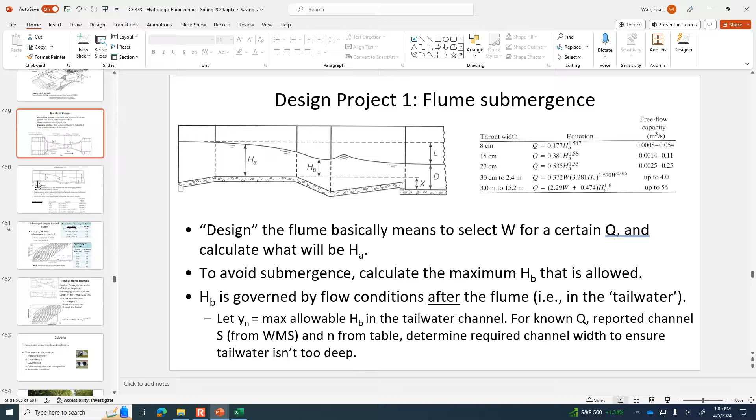Now, submergence is measured by H sub B, and that's not one of the parameters that goes into your equation. So the way that you know how deep H sub B is allowed to get is you calculate H sub A from the formula, and then you'll remember that there are these submergence criteria tables. Let me go back to where we were talking about flumes before. So here's the table of submergence criteria. So if you're using a 30 centimeter to 2.4 meter flume, then the ratio, the maximum allowed H sub B is 70% of H sub A.

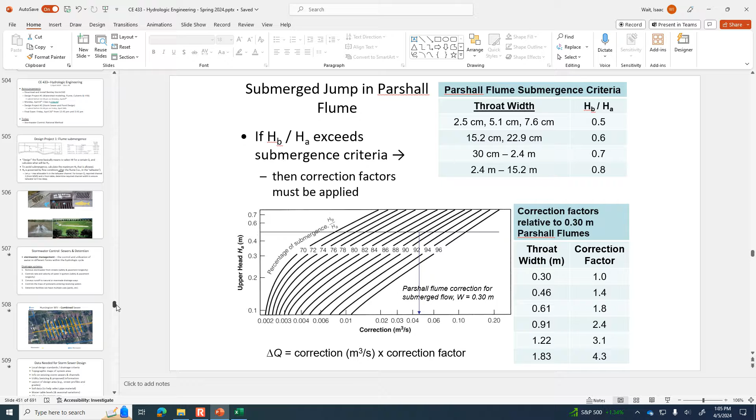Okay, so you just say, all right, so that's the deepest H sub B is allowed for the flume that you've just designed. By design, I mean you've selected the width and calculated the H sub A. So calculate H sub A, find out what's the maximum H sub B. Now what determines the H sub B depth is the tailwater.

And if the channel downstream is not able to convey much flow, like if it's relatively flat, or if it's very, very rough, or if the channel is narrow, then you would have a poor flow capacity downstream and a large depth. If the depth in the tailwater is too high, that will drown your hydraulic jump in the flume and exceed the allowable submergence. So what I'd like you to do is just analyze the tailwater.

And this is something that you've also done recently with the culverts. You know, there's that tailwater calculator within HY8. And so you don't need to use HY8. You can just use Manning's equation. Use Manning's equation and let the normal depth be equal to that maximum allowable H sub B, which you determined from the submergence table. So 70% of H sub A, for example.

And then find out how wide would the channel need to be for a typical n value from the table that's on the handout. So the table I gave you said, for example, earth-lined channel would have an n value of 0.02. So if you use that earth-lined channel 0.02 and the slope of the channel, you can actually get from WMS. One of the parameters that it estimates is the slope, not of the basin, not of the ground slope, but the slope of the channel, the main stream that's carrying flow.

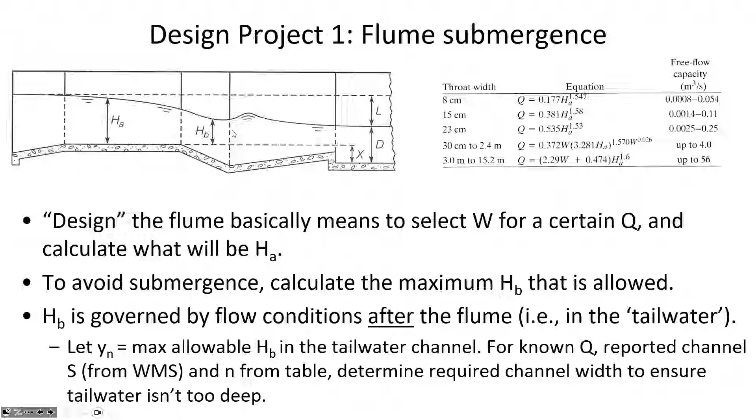Okay, well, let's talk about the rational method. We briefly dipped our toe into the rational method a few weeks ago because some people needed to hear about it for the senior projects. But let's revisit that.

You may have noticed in a lot of towns, including Huntington, some of the inlets have painted symbols in front of them, just to remind you that when you put something into a storm drain, it's eventually going to get out to a creek where there's fish. And so they're warning you, for example, don't dump used oil into a storm drain, or antifreeze; they sometimes get problems with people dumping used auto chemicals into these drains. And you shouldn't do it because storm drains will get back into the natural environment.

And sometimes water from storm sewers goes to ponds. Some ponds can just be an earth-lined area that doesn't have any development on it, a low point in a park, for example, or off to the side of a commercial development. Sometimes they can be really nicely landscaped, and it can be kind of a design feature. We're going to look at the sizing of ponds next week. But today we're going to look at what flow rate would be coming into a pond given a certain storm size. So we're moving on to the idea of stormwater management.

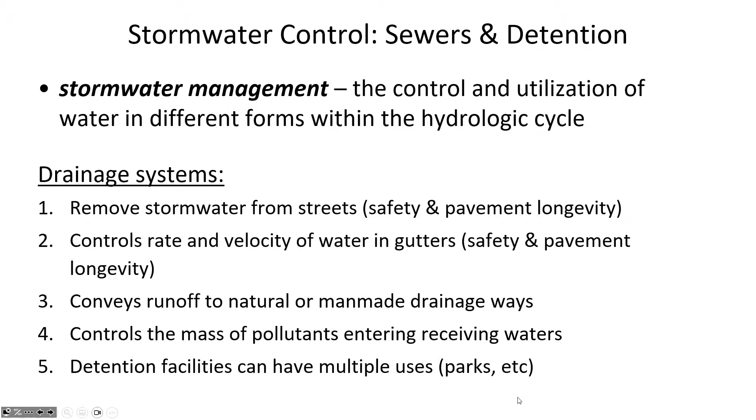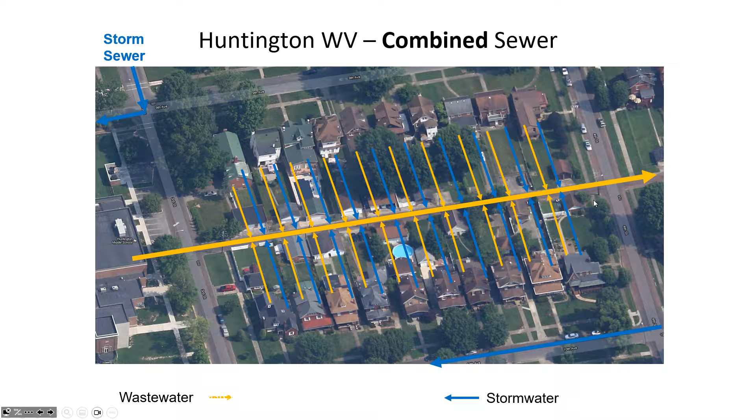And so a combined sewer would have both a base flow that's wastewater, but then also flows which vary quite a lot during storm events. So some of the things that we look for when we do a design and we're trying to manage stormwater is understanding local design standards, and if a city has regulations related to the allowable flow velocities or how much capacity you have to put into a sewer.

There are a lot of only locally applicable regulations that say how much flow capacity you have to have per square acre of land that's being developed, or how much flow capacity per 100 residents. And so you have to know those local design standards, and also having topographic data will allow you to know the slope of the land and how water's going to move around over the surface when it rains.

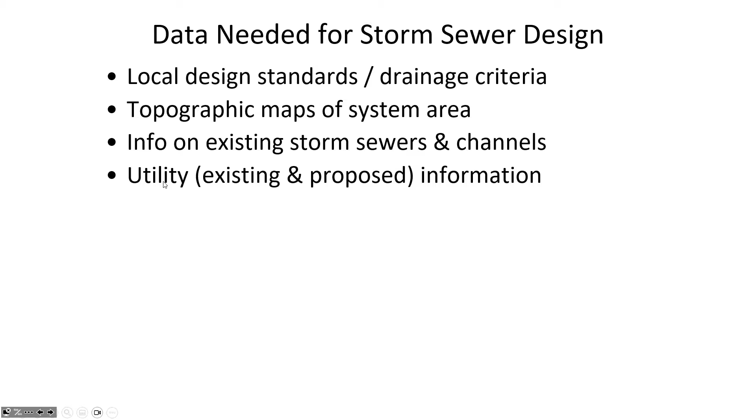Obviously, you'd want to have data related to where the existing pipes in the network are. If you're going to be putting new pipes in or trying to tie in to the existing pipes, then you don't want to overload the existing infrastructure. And so having all that existing data is really critical. There can be power lines that are also buried underground, internet, gas, and so all of the utilities you'd need to know about to try and avoid them when you lay out a new sewer line that's going in.

You'd want to have the information related to the street profiles and grades if you're expected to put in curb and gutter and inlets and manholes, then knowing where the new area development roadway network is. And then there are some soils which can be corrosive to certain types of pipe. And so whether you use concrete pipe or plastic pipe, or in some rare cases they'd use metal pipe for a stormwater drain, you need to have soil data in case there are any kind of corrosion concerns having to do with the materials that you're using with your network.

Knowing the water table helps you to know whether the risk of buoyancy of the pipe is a problem, because some pipes which are relatively light, like a plastic pipe, if the water table is above the pipe, then there can be a buoyant force that pushes the pipe up, and in some rare cases the pipe can actually break through the pavement that's over the top of it,

if the water table is high enough and the diameter of the pipe is high enough, the buoyant force may exceed the weight of the soil on top of the pipe. So knowing the water table can be another factor that you use in determining whether you're going for a heavy pipe material where buoyancy would be less of a concern, like a concrete pipe. Rainfall data for the project area, pipe property.

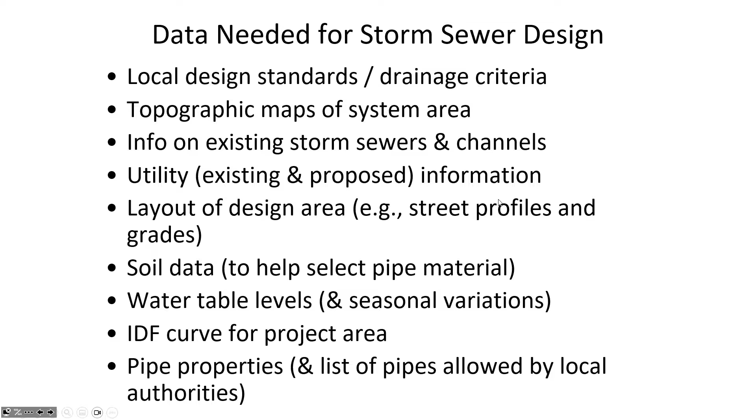So all of this would be kind of the baseline of information that we'd want to collect before we do a design and figure out what type of pipe we're going to have for conveying stormwater, where it should be located, the required diameter, how frequently spaced inlets are.

So some of the things that we'll assume for stormwater collection networks is just that water is flowing by gravity. Hopefully we can achieve that, because when you put in a pump station for stormwater or for sewage, it's really expensive to lift water and to pump it from one place to another.

Electricity costs already account for a huge percentage of the cost of treating wastewater, and that's even before you take into account the electricity that could be consumed when you're pumping water from place to place. So ideally what you want to do is design your flow so that it's going towards the lowest part in the network, and you don't have to put in pumps to move the water around.

Typically, stormwater is moved through circular pipes, which are commercially available, and so that may limit the variety of sizes that you have. So there could be a 15-inch pipe, a 12-inch pipe, an 18-inch pipe, but maybe there wouldn't be a 14-inch pipe or a 13-inch pipe. So you just have to be familiar with what you can get your hands on in the area where a project will be done.

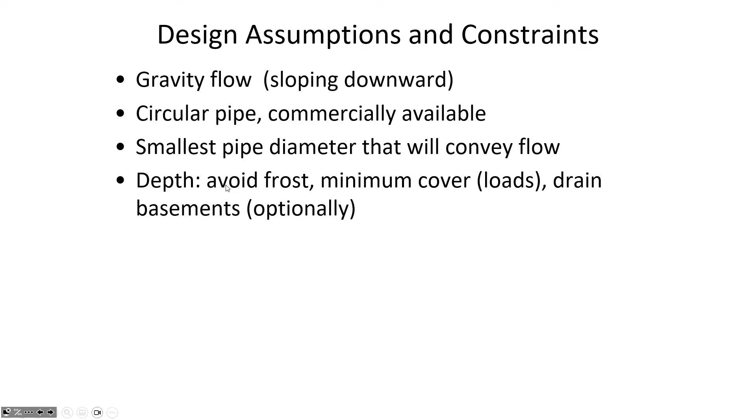We have to have some minimum cover over the top of the pipe to help distribute loads and also, depending on the climate of the area that you're in, if you bury the pipe deep enough, then the water will stay liquid even during the winter time, when otherwise it might freeze if it was buried too shallow.

So minimum velocity and sediment deposition is an issue that we're going to want to keep an eye on, the flow being too low, but also if the flow velocity in the pipe is too high, that causes erosion of the pipe and scour.

One of the principles that we employ in design is that in a dendritic pipe network, which is all funneling down to one central location where the flow is collected and discharged to a stream, or if it's being collected and treated at a treatment plant, the pipes only get progressively larger to prevent clogging. So you wouldn't have a big pipe connected to a smaller pipe and flow going from the large pipe to the smaller pipe, because then that's a risk of it becoming clogged.

So just for that reason alone, even if it's not needed from the perspective of capacity, like if you had a really steep section of ground, even if you could get away with a 12-inch pipe, if there was a 15-inch pipe prior to that steep section of ground, you'd stick with the 15-inch diameter. Even though it may not be needed hydraulically, we don't have smaller sections of pipes because they can get clogged.

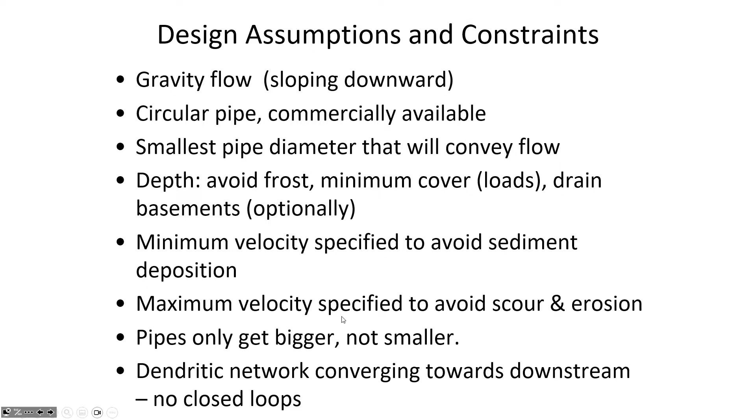And sewage treatment cost is mainly tied to the volume that's being treated, and less so related to the strength of the sewage, meaning the concentration of pollutants like BOD. And so you really want to reduce how much water is getting into the sewage treatment that doesn't need to be there. So you wouldn't want drains from the roof connected to your sewer system, because that's adding to the volume that needs to be collected and treated, and it's very costly.

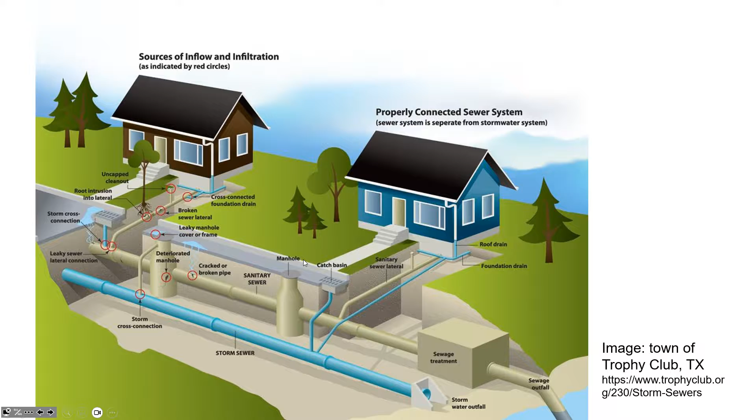An important part of managing stormwater infrastructure is doing regular inspections. And they're getting these increasingly sophisticated drivable robots that will go down in the sewer. And so far, they're always monitored by a human at the surface, who's watching a TV screen of the robot driving through the sewer.

And what they're looking for is cracks in the pipe. They're looking for illegal connections where people have put a pipe that they're not paying a sewage fee for. They're looking for what shouldn't be there, so that they can make repairs, or for violating people who are discharging to the sewer that shouldn't be.

I think in the future, most likely, they're going to have these systems become automated. And so they'd use sort of image evaluation and AI technologies to send sewer inspection robots down into the sewer, and then they wouldn't have to be monitored in real time, but maybe if the software detected an anomaly, then a technician would look at the pictures just at the problem sites rather than the whole time. The issue is that just knowing where the problem is doesn't always allow you to fix the problem.

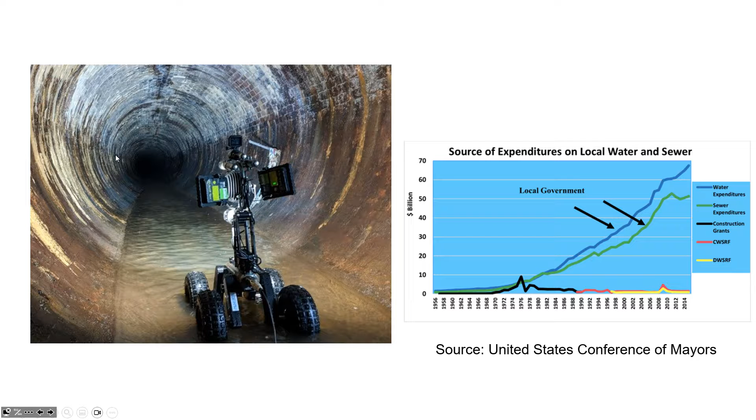But I just wanted to point out that this is more than just an engineering problem. It's also a political problem and an economic problem, maintaining this infrastructure. And so we have to think about that from an engineering perspective. Like when we are developing new land and we're putting in infrastructure, the client has to be guided in how much to set aside for the future maintenance of roads and sewer networks.

So some of the numerical limits that we're going to be applying when we do design with StormCAD is that there should be a minimum velocity associated with self-cleansing and a maximum velocity that's allowable related to scour and damage of the pipe. There's a maximum spacing of manholes that you'd want to have in place because you need access to the sewer at regular intervals for inspection and cleaning. Because not all sewers will be perfectly self-cleansing, and so they sometimes need to flush the accumulated sediment out of the bottom of the sewer. And so a spacing of 400 to 600 feet is appropriate to make sure that you can get access for cleaning and inspection.

Most sewers would have a minimum pipe size, which even if it's not needed hydraulically, a 12-inch minimum size would allow you to get camera systems down inside to inspect them. And then the other thing I wanted to point out here is that surcharge is pressurized flow in a network that is intended to flow open channel and under gravity. And so if we have a pipe that is most of the way full, so it's nearly to the top, it actually has more flow capacity when it's most of the way full than if it's all the way full.

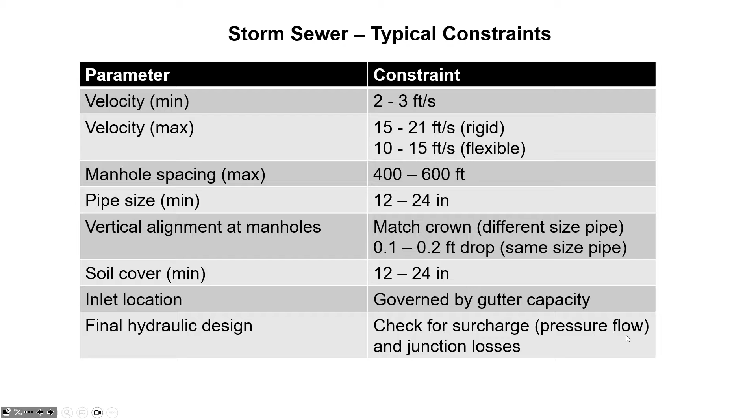the network, and so consistently in wet weather, I don't know if it's a combined sewer there or if it's just that there's a lot of infiltration and inflow into the storm sewer, but sewage is getting out there, and you can smell it because they have pressurized surcharged pipes where the amount of water in the pipe is so high and the pressure of it that it's actually coming out of the inlet covers and grates and so on.

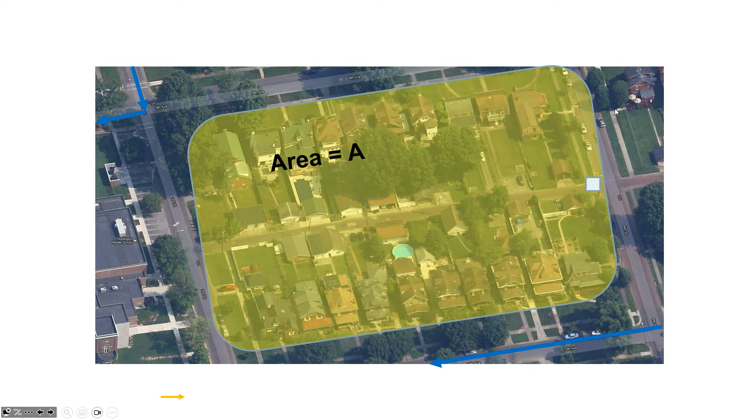So the rational method says if we know the area in question that we want to provide service to, then there's going to be a certain amount of rainfall intensity for a storm that we're interested in. So we can get that data from the precipitation frequency data server, the rainfall intensity for a return period of, say, 5 years or 2 years.

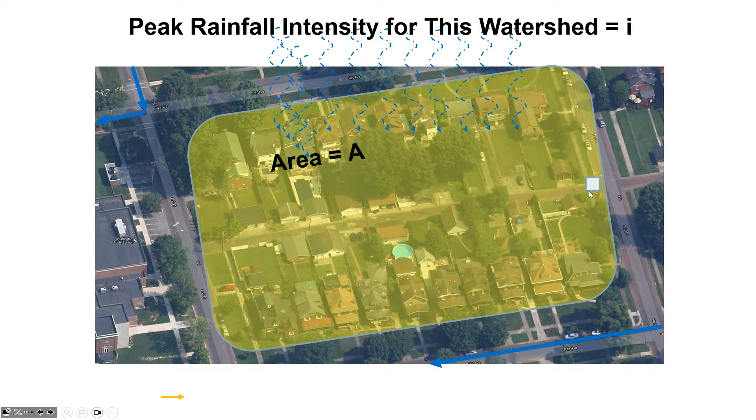Whatever we want to analyze, we can get the rainfall intensity that's associated with the return period at also the time of concentration. Remember, the time of concentration is how long it takes for the water to travel from one edge of the network to the collection point that we're interested in. So we could use the Kerby method, the Kirpich method, NRCS. There's all these different equations depending on what data we've got available and the level of precision that we require in estimating the travel time.

And so when we know the time of concentration and the intensity, then we will assess the ratio of runoff to the amount of rain that's coming and determine a C value. So we've talked about this before and how the peak runoff Q is equal to the intensity of the rainfall multiplied by the area multiplied by the C value. So Q equals CIA.

And what's the units coincidence? Do you remember the coincidence of units, like talking about the units of the left-hand side of the equation and the units of the right-hand side equation for traditional British gravitational units? With the area in acres, it'll give you a Q in cubic feet per second. And then inches per hour. Inches per hour. Good. That's right. And of course, C is unitless. So it's good you remember that.

It turns out that there's actually a units conversion factor of 1.008, if we want to make it perfectly so that it's cubic feet per second on the left-hand side, and the units that we've used on the right-hand side, inches per hour for intensity, acres for area. But 1.008, we don't usually know the C value with enough precision to even bother with that correction factor. So we'll just leave it as 1.

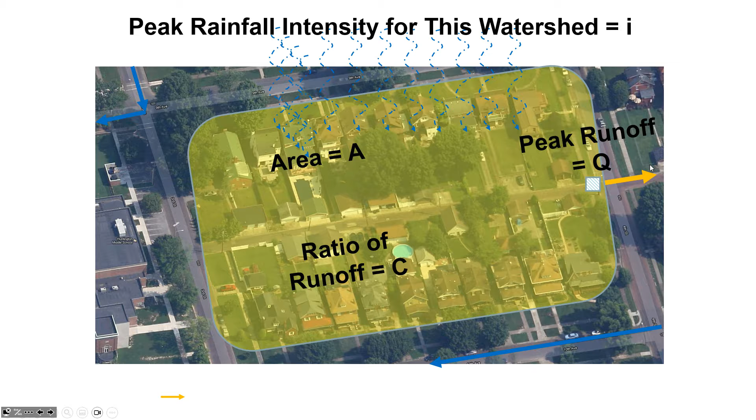So in SI units, what we'll usually do is express the area in hectares, convert it to square meters, have intensity reported to us in millimeters per hour, and we could convert that to meters per hour. And then from that we get cubic meters per hour, and we can convert it to cubic meters per second.

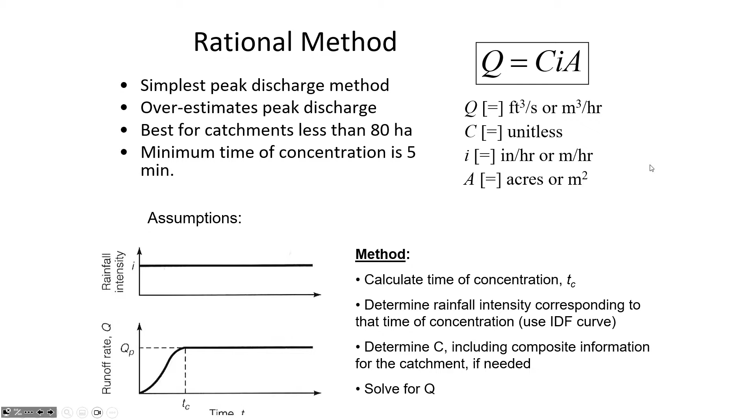So we've seen this slide before when we jumped ahead in that prior lecture. We've seen the C values for different types of materials, how, for example, if you've got a grass lawn on a flat area and you're estimating the runoff from a 2-year storm, then we'd have the C value being 0.3. No, for grass in, let's say, good condition, then it would be 0.21. So only 21% of the rain would run off, and the rest of it, 79%, would infiltrate or be retained

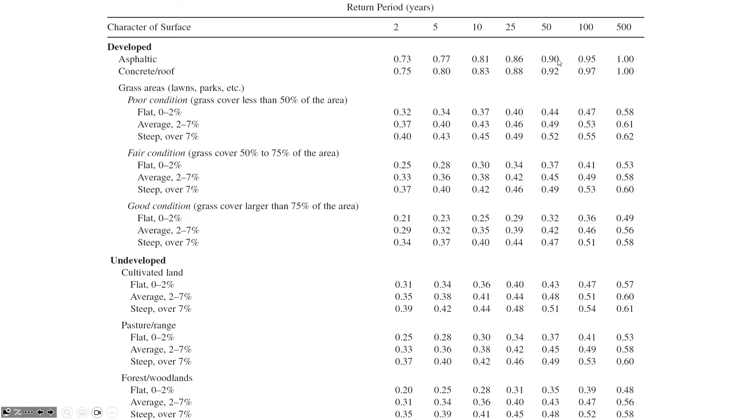on the surface. And then, of course, as the return period increases, so does the C value, meaning that more is going to run off. A greater fraction of the flow is running off for these large storms that have more volume to them. And then urban areas which are developed, like impervious surfaces like concrete or asphalt surfaces, have much higher C values, which also increase in value as the return period goes up. So we've seen these C values before, and we're going to skip over this example.

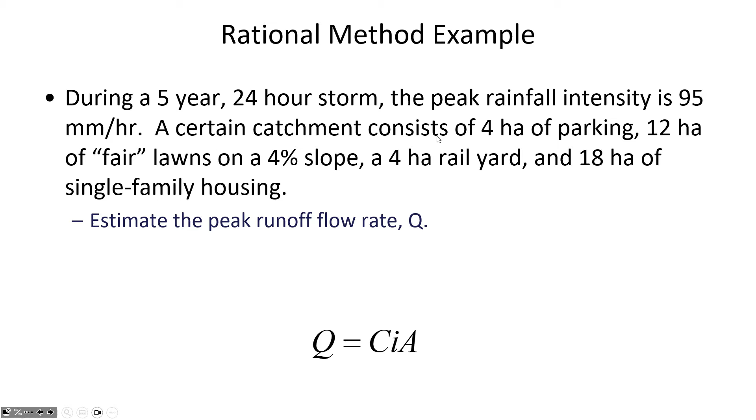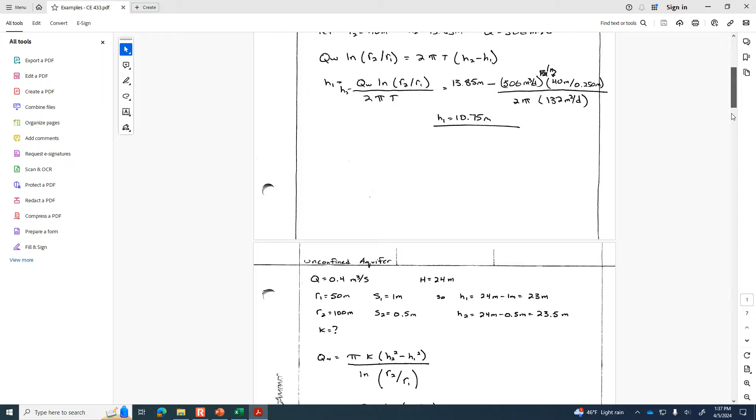This is just the same kind of thing where if you've got a certain amount of it that's parking, a certain amount of it's lawn, certain fraction is rail yard and single family housing, then what we would do is calculate a composite C value, composite runoff coefficient, like an area weighted runoff coefficient. So you can see here, if we knew a certain amount of area is each one of these, then we calculate a weighted C value based on not only the C value of the individual constituents, but their area.

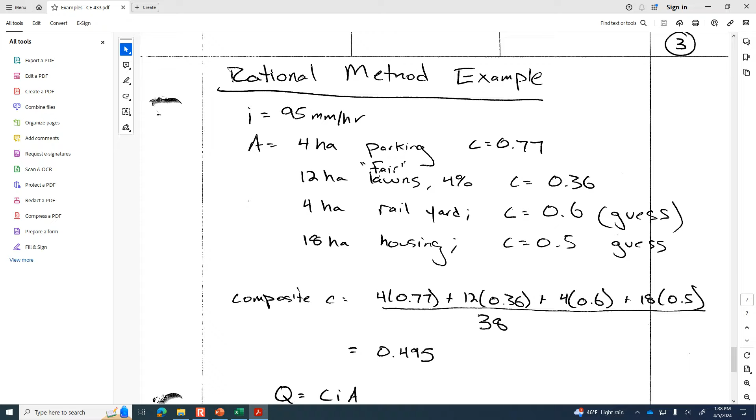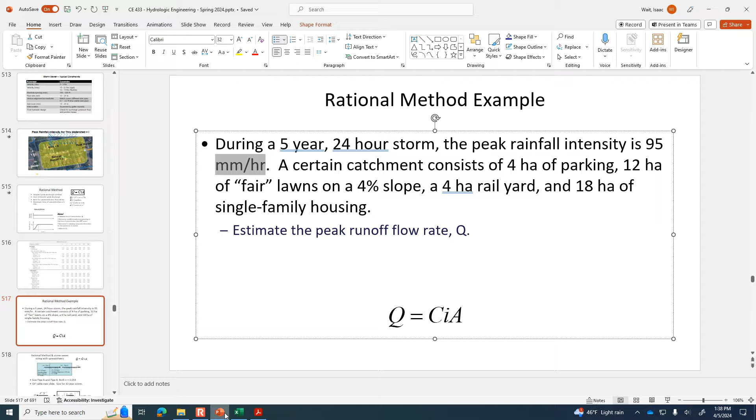And then in this problem, we were told what the rainfall intensity is, 95 millimeters per hour. And then this area of the overall watershed of 38 hectares, we could multiply that by, there's 10,000 square meters in a hectare. So Q equals CIA, this would give us the peak runoff from a certain area. You've seen that before. What I want to save time for is this example. It's an example where I've placed a spreadsheet onto Blackboard, and we're going to work through it together.

It's calculations that could be done by hand, but depending on how complicated a network is, it may just be a nuisance for us to do page after page of hand calculations. And so if we have a pipe network with dozens of pipes, then setting up a spreadsheet could allow us to copy and paste formulas and save a little bit of time as we size the pipe. So we're going to do design with this spreadsheet.

And by design, there's a lot of parameters we can't control in a drainage network. Like the slope of the pipe is not something that we generally have engineering control over, because we have to have the slope of the pipe match the slope of the ground, typically. You couldn't have the slope of the pipe be really steep if you're in an area that has flat ground, because then the pipe is going to be so deep that you'd have to pump the water back up again.

We won't have engineering control over the area that's being developed. That's just, if someone's developing a commercial area, or if it's an existing part of town that we're finally putting in a drainage network for. The areas are a given. The C values are things that we'll look up based on the characteristics of the neighborhood and the tables we just saw. So when we do rational method analysis to design a storm sewer, we're just basically finding out what's

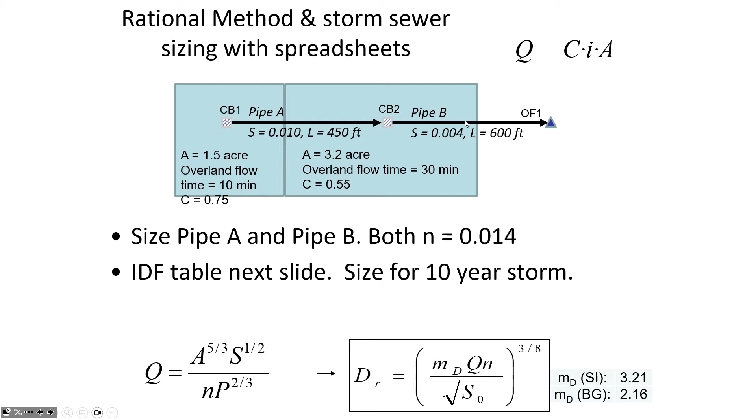And then for the second area, you can see it's bigger, 3.2 acres. It takes 30 minutes for all areas of that watershed to be contributing to flow at catch basin 2. So we want to find out how big should pipe A be, and how large should pipe B be. Okay, so here's the steps we're going to go through. Here's a precipitation frequency data server that I think is at the bottom of the file that I've given you for the location we're interested in.

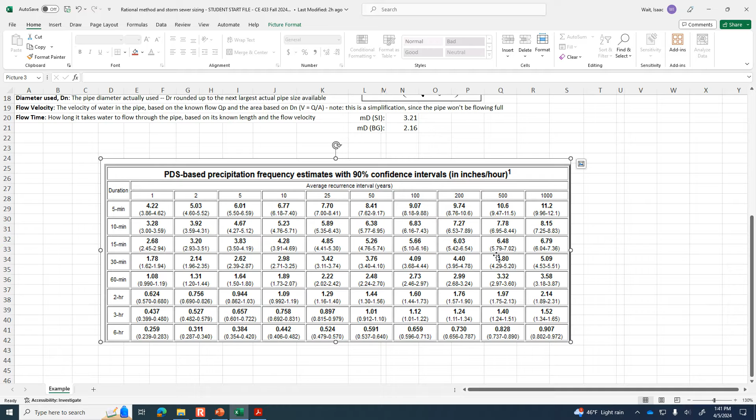I don't know why that's missing. Is yours got an empty spot? Oh, there it is. I don't know. Maybe it's just the monitor being weird for a bit.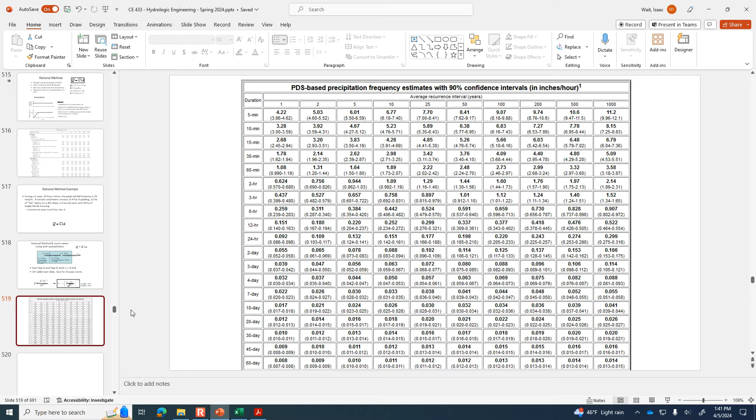Okay, so we're doing the 10-year storm. That's the setup here. We want to size the pipes so that they can carry the flow from the 10-year storm. We're going to calculate the flow rates that should be accommodated with Q equals CIA. And then Manning's equation has been rearranged to solve in terms of the diameter that's required.

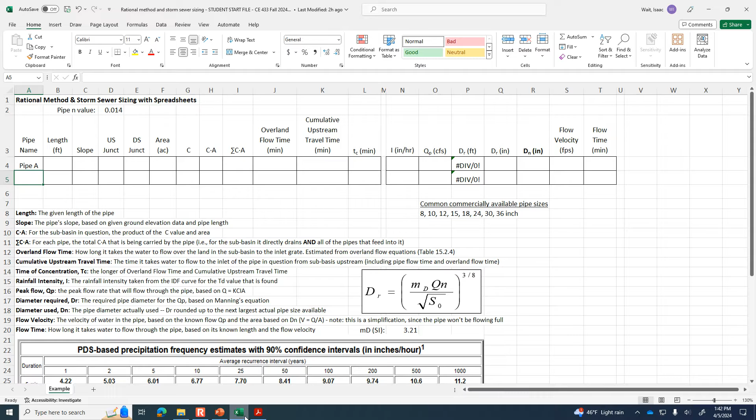Okay, so here's the template file. Have you found that online? Have you got it? Okay, let's start with pipe A. Pipe A, which is this first one, which is carrying water from catch basin 1 to catch basin 2. So the question is, how big should it be? Let's put in the parameters that we know about pipe A.

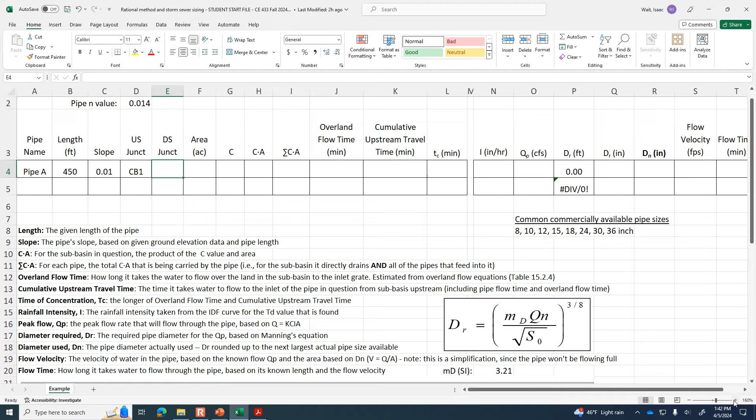Its length is 450 feet. The slope is given in the problem statement here in the diagram, 0.01. So it's a 1% slope, 0.01. The upstream junction is catch basin 1. The downstream junction is catch basin 2. We're just putting in what we know about this system. The area of the watershed that feeds water to pipe A is 1.5 acres. So we're working in traditional units here.

The problem statement says that this first watershed, the one on the left, has a C value of 0.75. Okay, so the C value is 0.75. Okay, now we're going to do our first calculation here. C times A. So it's the C value multiplied by the area,

1.13. This next column, you can see here I've explained what all these different columns mean and what you should do. So if you want to review this later, be sure to read through these definitions, and it'll help you to understand what we're doing in each cell.

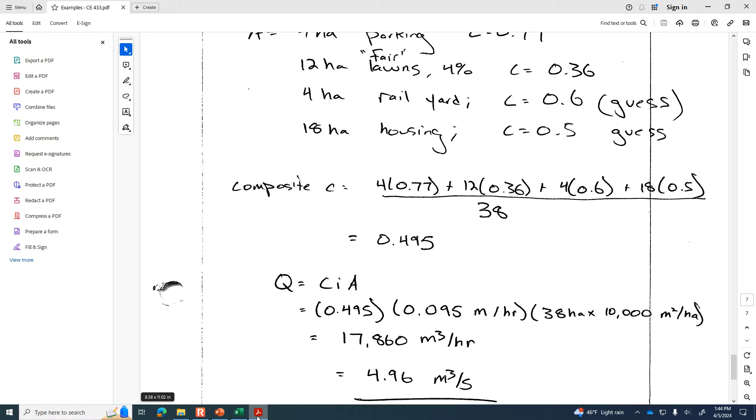The sum of CA for a pipe that has no other pipes upstream of it. So pipe A doesn't have an upstream contributing pipe. It's just going to be the area and the C value of this first watershed. The sum of CA will be different for pipe B. But for this first one, we're just going to do the same as the previously calculated 1.13.

The overland flow time was given as 10 minutes. That's how long it takes for the flow to go over the surface. And there's no upstream area before pipe A. So the cumulative upstream travel time is 0. And so therefore, the cumulative time of concentration is just the 10-minute overland flow time.

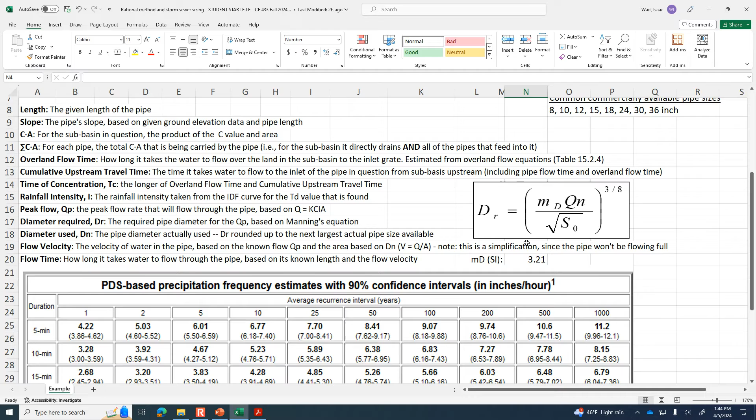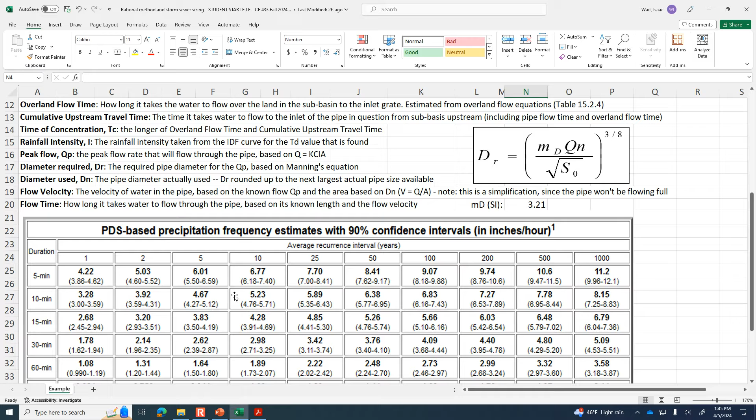So now the intensity that's associated with that, if we go down to the table, we're doing a 10-year storm, 10-minute time of concentration. So here's the 10-year storm. Here's 10-minute duration of the storm, and it says 5.23 inches per hour is the intensity. So let's put in the intensity of 5.23 inches per hour.

And so Q sub P, the peak flow rate, is Q equals C times A times the intensity. So CA is the C value and the area. Intensity obviously is the rainfall depth and the time in hours. So that's going to be 5.88 CFS that's flowing through the pipe at the peak condition.

So let's look at this formula for diameter required. I didn't intend to already have it in there, but it might be fortuitous based on how much time we've got left. So the formula that's in there for D sub R is this one. So let's just make sure it's using that M sub D, which should be for traditional units 2.16. So do I have the 2.16 factor in there? Yeah, I'm referring to this as the M sub D part of it.

So that formula is calculating it needs 1.24 feet, which in inches, just multiply that by 12. So it says we need a 14.89 inch pipe. Well, they're not going to have pipe that's exactly that diameter. We have to round up to the nearest commercially available size, which would be a 15-inch pipe. You can find 15-inch pipes typically.

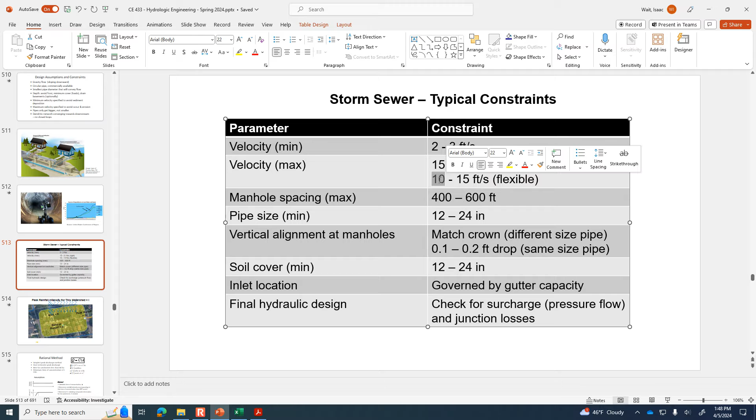So how does that fit in with our minimum and maximum, like these typical values? Normally we'd want to see between 2 and 3 feet as the minimum velocity. We're above that, that's good. And we're below the maximum of, in a flexible pipe like a plastic pipe, you'd want to have maybe at a maximum 10 feet per second. Regardless of what this is made of, whether it's concrete or flexible pipe, we're good.

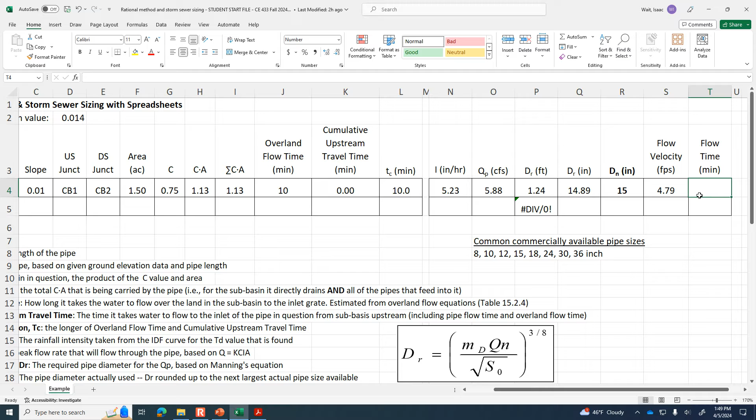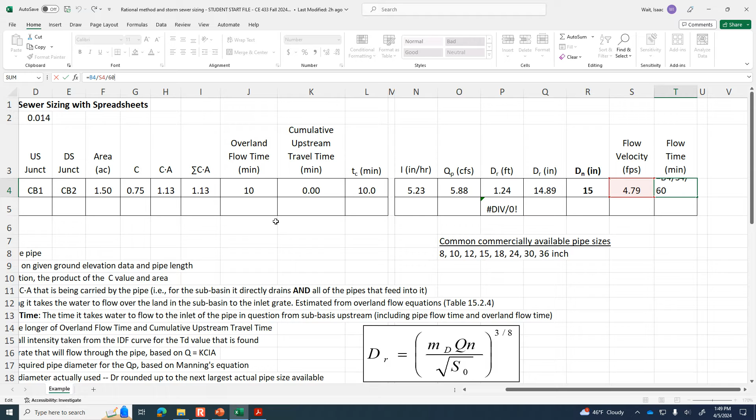So the flow time then would be the distance of 450 feet divided by the velocity. And so it's going to take, now I need to divide by 60 to get minutes. So that was seconds. Minutes is 1.56. So the formula is the distance of 450 feet divided by feet per second, and then divide by 60 to get the flow time in minutes.

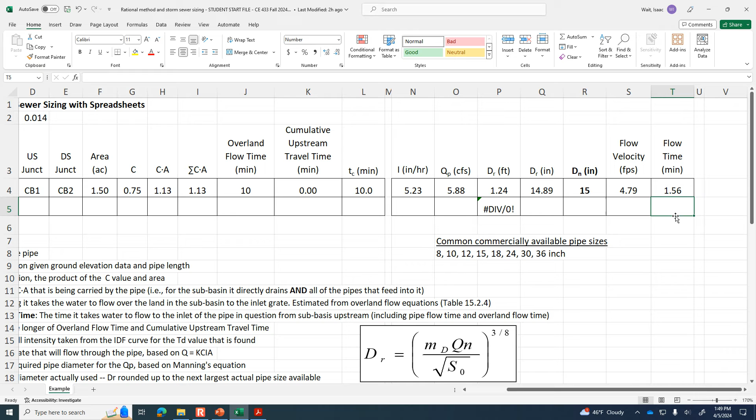Okay, the last one I'm going to do real quick. It's 1:49, and I think that I may keep you 1 minute over today, if you will indulge me.

Let me just show you what we do for pipe B. Pipe B was 600 feet in length. Its slope was 0.004. It goes from catch basin 2 to the outfall 1. The area of that watershed component is 3 acres. Let me just make sure. Was it 3 for that diagram? 3.2 acres. All right, so let me change this. 3.2 acres. The C value of that section was 0.55, and so C times A

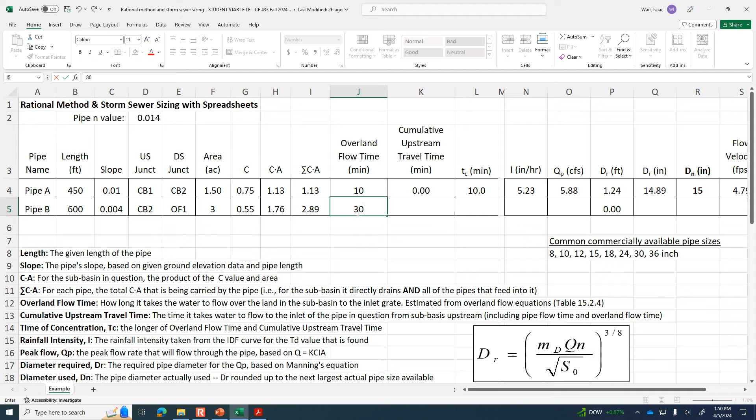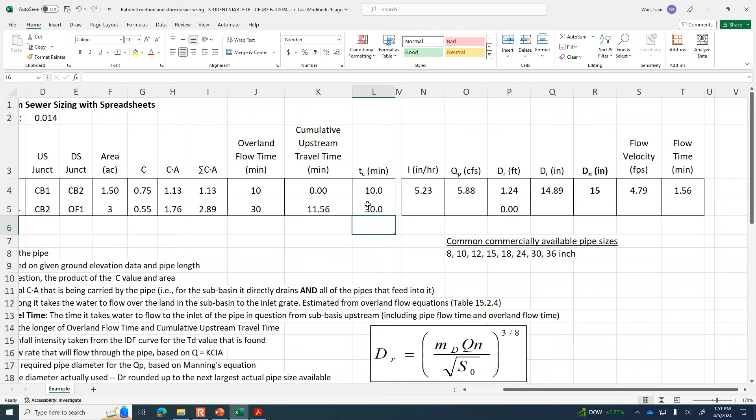is 1.76, and then the sum of CA is both of the areas that are upstream are going to contribute flow to pipe B. So pipe B is carrying the water from this area and also the water from this area. So pipe B has 2 different amounts associated with it. The overland flow time was given as 30 minutes, and there was an upstream flow time of 1.56 plus the 10 minutes. So we take the bigger of these two, which is 30 minutes to be the time of concentration. So what governs is the larger of the contributing times.

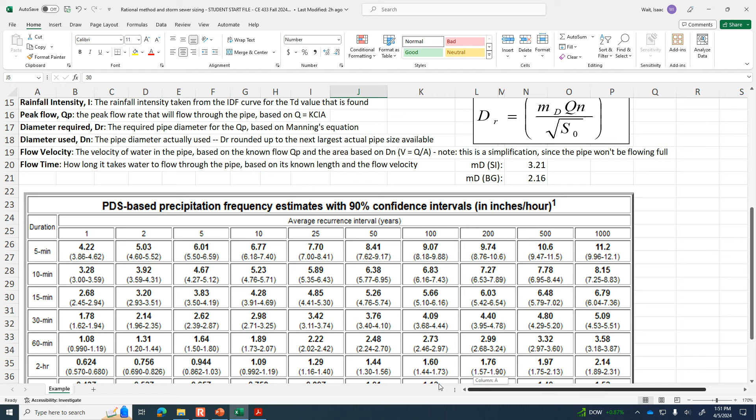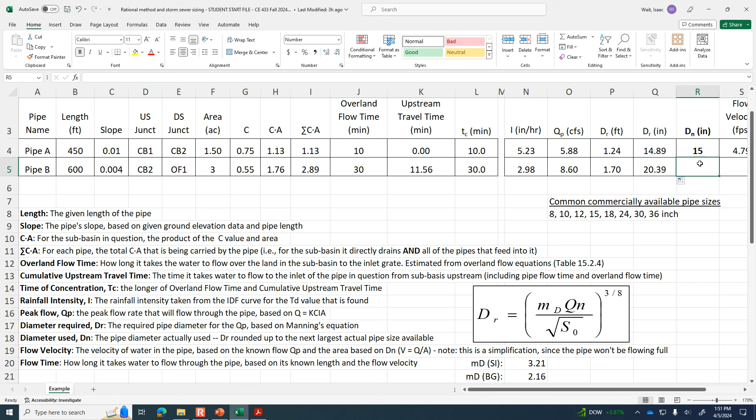So we go down to our table, 10-year storm, 30-minute duration, 2.98 inches per hour. The peak flow rate would be intensity times the sum of the CA. So there's going to be a total of 8.60 cubic feet per second through there. You can see the required diameter would be 1.7, which works out to 20 inches. The closest one we have is a 24-inch pipe. So if we've got a 24-inch pipe, then that means that the velocity of flow is going to be 2.74. We're getting closer to that lower limit of 2. And the travel time through that pipe would be 3.65 minutes.

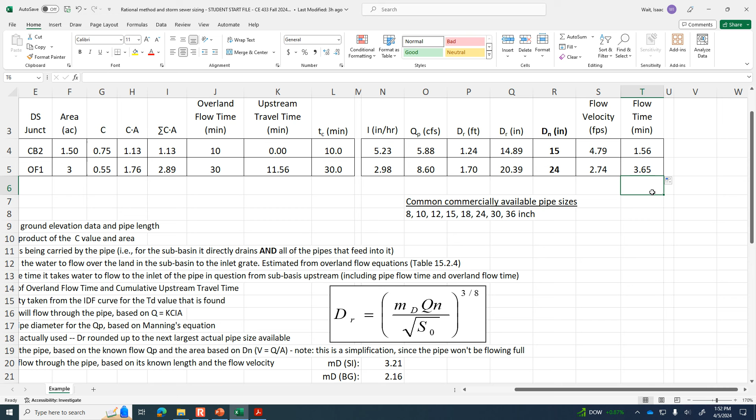All right, 1:52. I actually kept you 2 minutes late. I'll give you back that 2 minutes, I promise.

But I wanted to show you that design example. That's how we can do it manually. On Monday, the recorded video there is going to get into how we do this with StormCAD. So it's an automated way to avoid having to do it, setting up all the formulas manually.